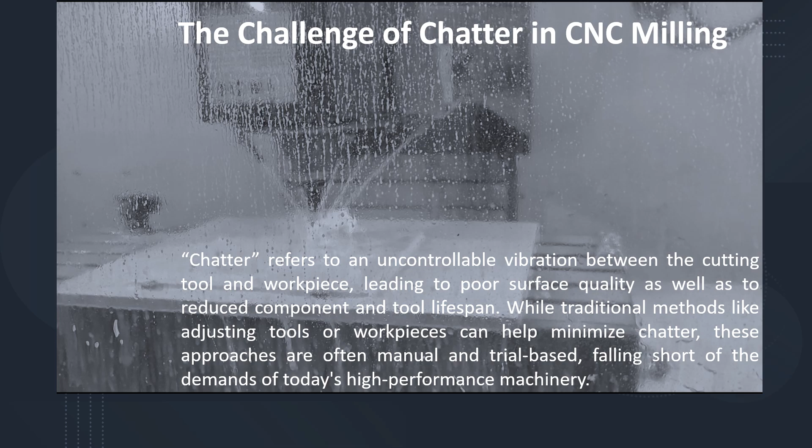Despite its benefits, CNC milling faces a common issue called chatter. Chatter refers to an uncontrollable vibration between the cutting tool and workpiece, leading to poor surface quality and reduced component and tool lifespan. While traditional methods like adjusting tools or workpieces can help minimize chatter, these approaches are often manual and trial-based, falling short of the demands of today's high-performance machinery.

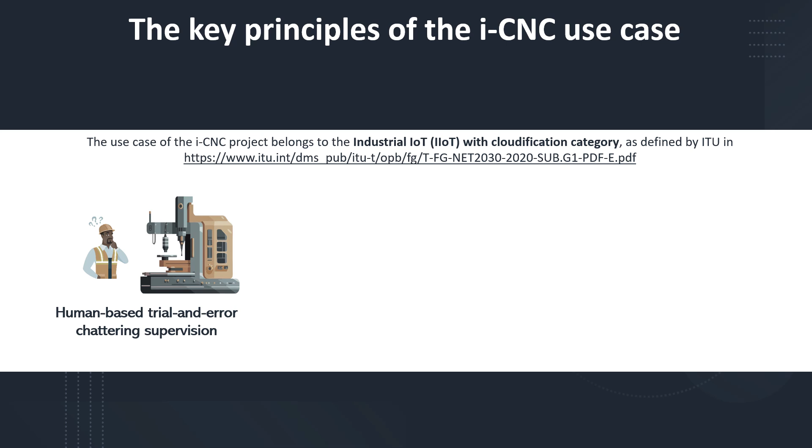The i-CNC use case belongs to the Industrial IoT with Cloudification category, as defined by ITU. The use case focuses on transforming the current CNC machining paradigm by addressing the chatter problem through an end-to-end solution that replaces traditional trial-and-error chatter supervision with a cloud-based and AI-enabled autonomous system.

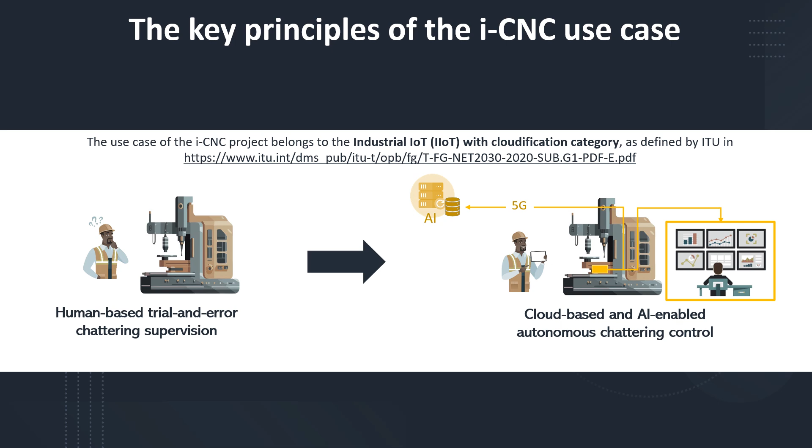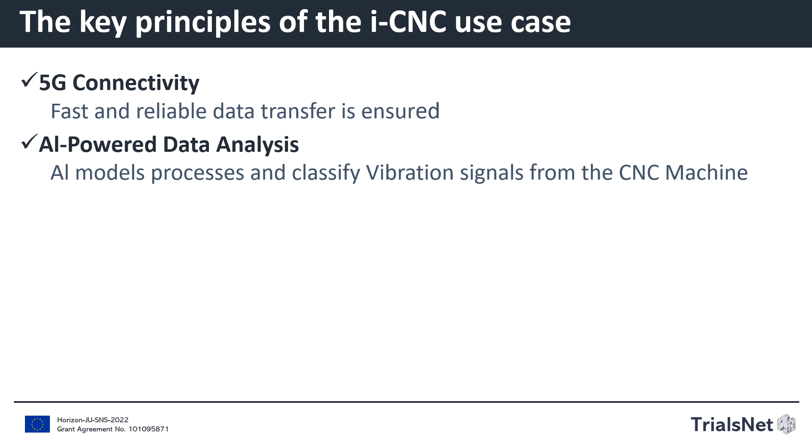The key principles of the i-CNC use case are: 5G connectivity, ensuring fast and reliable data transfer; AI-powered data analysis, where AI models process and classify vibration signals from the CNC machines; cloud-based scalability, where cloud services enable scalable use of more complex and efficient applications; security and interoperability, following industry standards for secure data exchange; and continuous data collection, where datasets are produced for long-term analysis.

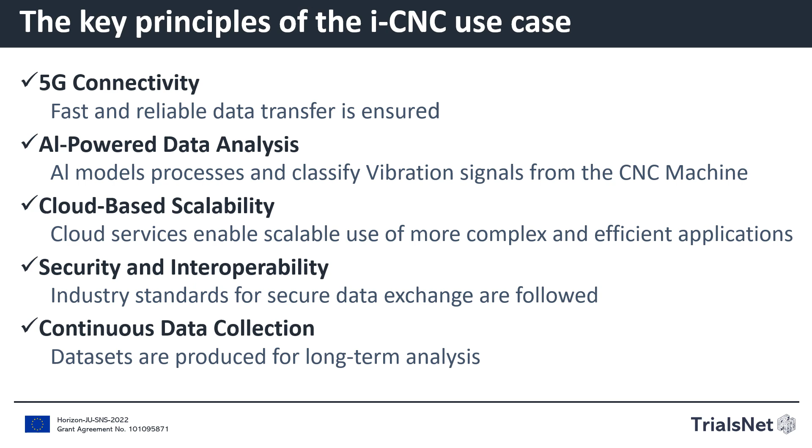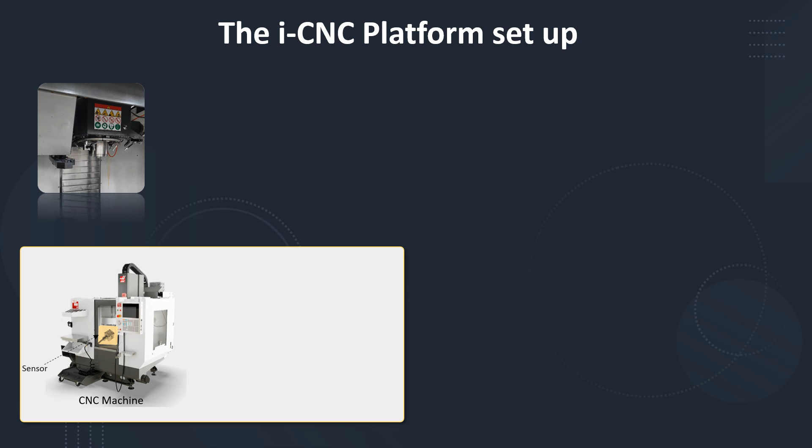The setup of the i-CNC platform is as follows. A vibration sensor has been mounted on a CNC machine. A data acquisition system and a local processing unit collect the vibration signals. The signals are digitalized and fragmented into network packets.

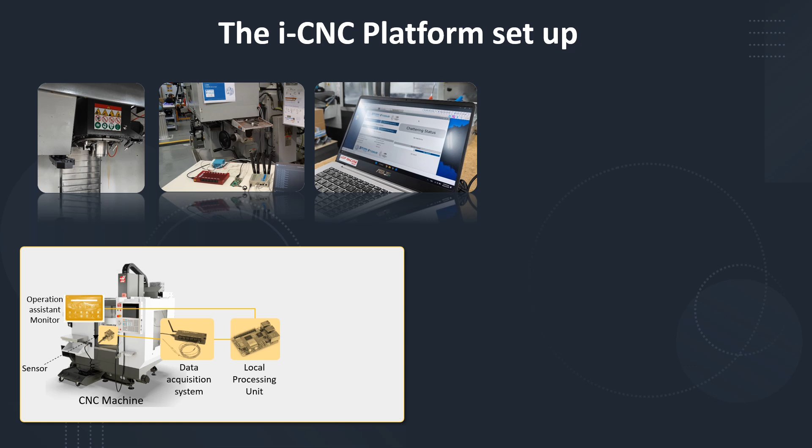The local processing unit feeds an operational assistant monitor, while at network level, it sends the produced packets to an industrial 5G router. Through a VPN connection and over a commercial 5G network, data are collected in a cloud infrastructure. The data are processed by an AI assessment unit, and the results become available to the local processing system through an MQTT server.

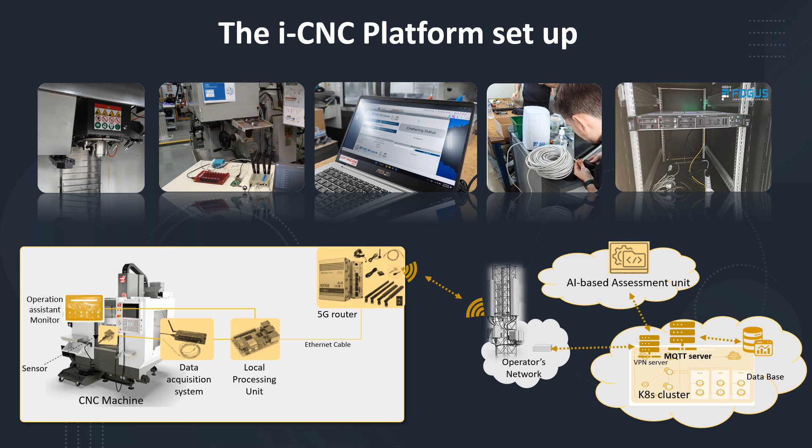The required key performance indicators for the i-CNC use case include round-trip latency of up to 150 milliseconds, 99.9999% service availability, as well as 90 to 95% accuracy of the AI application.

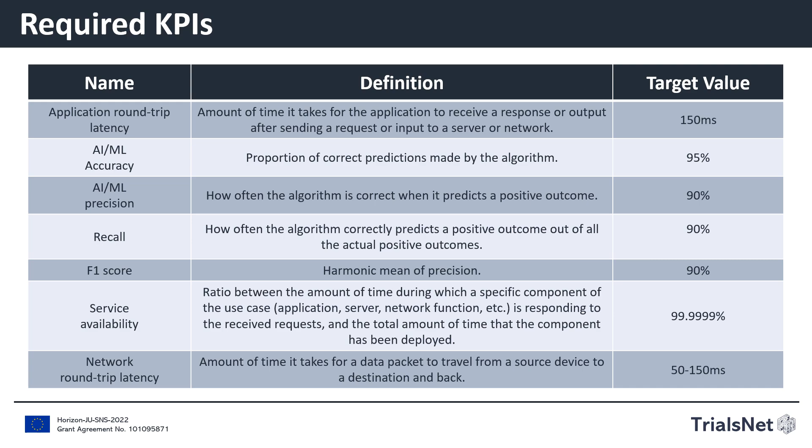The first set of end-to-end tests has been completed.

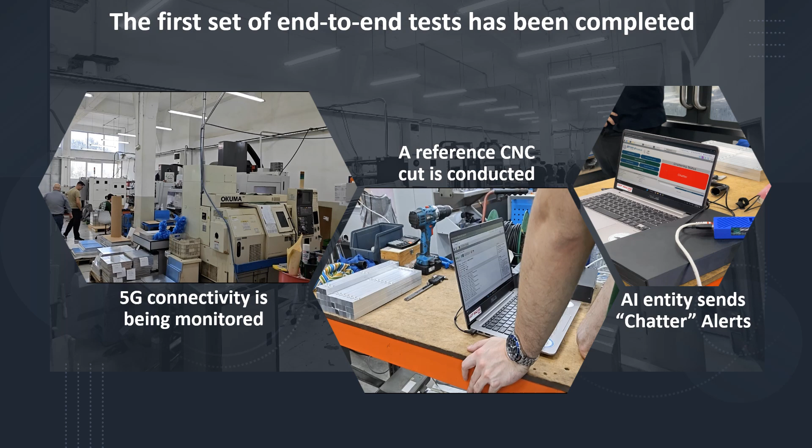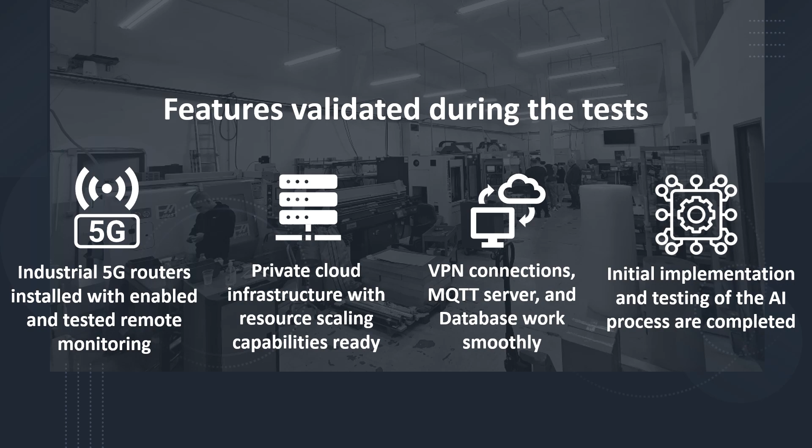The features validated during the tests are the industrial 5G routers with remote monitoring, the private cloud infrastructure with resource scaling capabilities, the VPN connections, and the MQTT server, as well as the initial implementation of the AI application.

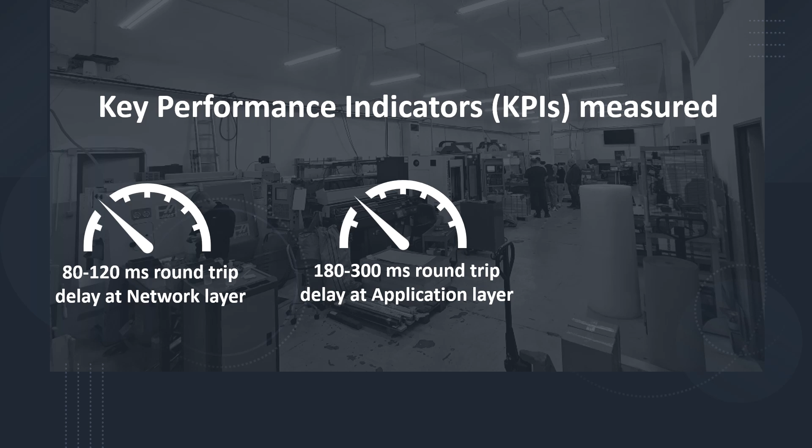Indicative key performance indicators, KPIs, that were measured during the tests are 80 to 120 milliseconds round-trip delay at network layer, 180 to 300 milliseconds round-trip delay at application layer, as well as adequate user experience, given an unobservable time difference between the stimulus and the alert.